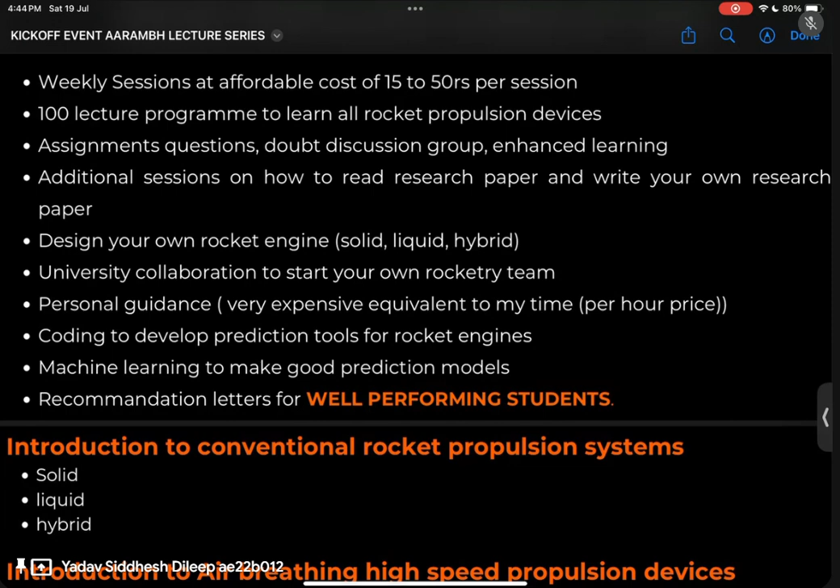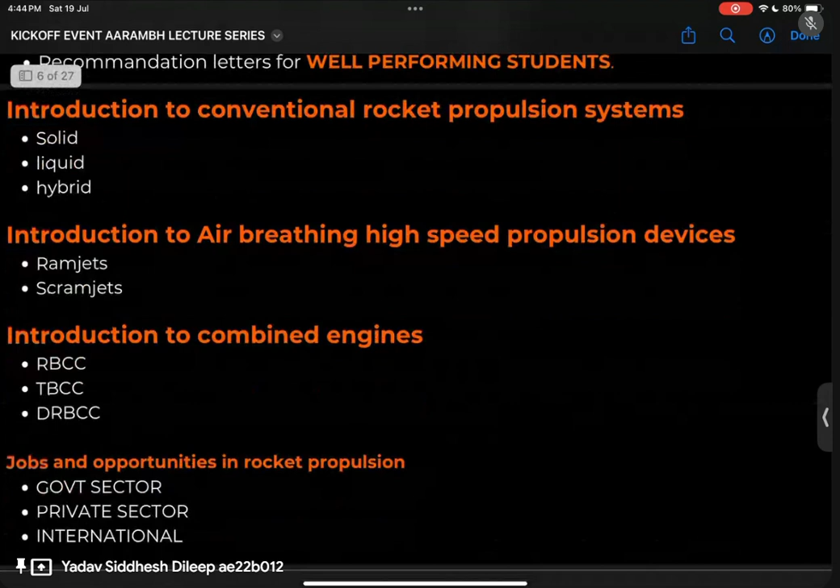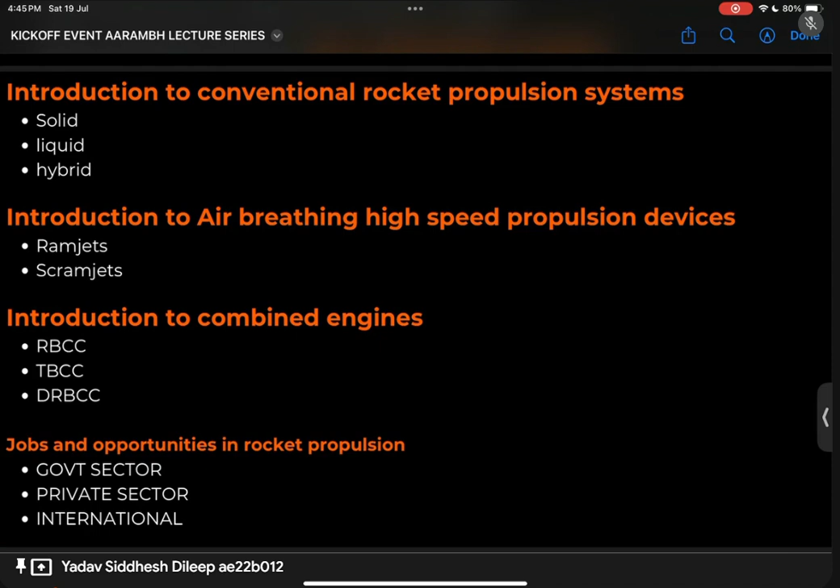Starting today's session, I will talk about four topics. First, introduction to conventional rocket propulsion system. Second, introduction to air breathing high speed propulsion devices, that is ramjets and scramjets. Third is a very complicated topic that very few people in the world work on, and this is the domain I want to pursue my career in, combined cycle engines, also called RBCC, DRBCC, TBCC, TRRE, etc. These are rocket based combined cycle engines, dual rocket based combined cycle engines, turbojet based combined cycle engines. Then we'll talk a little about the opportunities available.

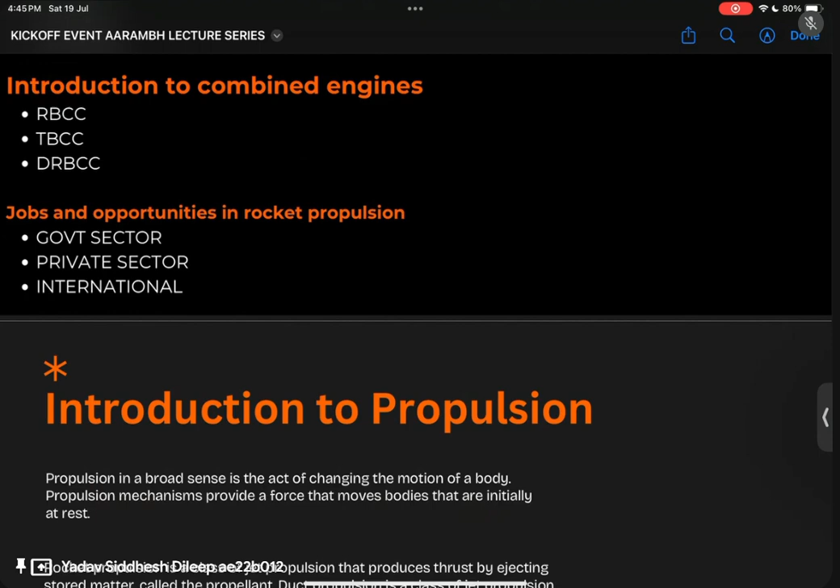Starting with the classification of rocket propulsion system, it's divided into two parts: thermal and non-thermal. Thermal is related to heat, meaning you release heat energy, you burn something or have some form of energy released as heat, and that thermal energy is converted into kinetic energy with the help of a nozzle, giving high thrust. Non-thermal is everything except thermal energy, that is solar, cold gas thrusters, electrical beam thrusters, nuclear ion based, etc. That's the basic difference between thermal and non-thermal.

We will be looking at thermal propulsion systems, specifically chemical propulsion systems in this course, and later we can see other systems. Within thermal, there's chemical and non-chemical, these are the ways to produce thermal energy. Chemical means using chemical energy to make a reaction, converting it into thermal energy, basically exothermic reactions. In chemical, you have monopropellant and bipropellant.

Now I'll give a small example. Take a candle burning. You have a candle burning and you put a glass on it, and what happens is the candle stops burning. This is a very important example, because what's happening here is you're stopping the oxygen flow by putting the glass on the candle, since no more oxygen reaches it and it stops burning.

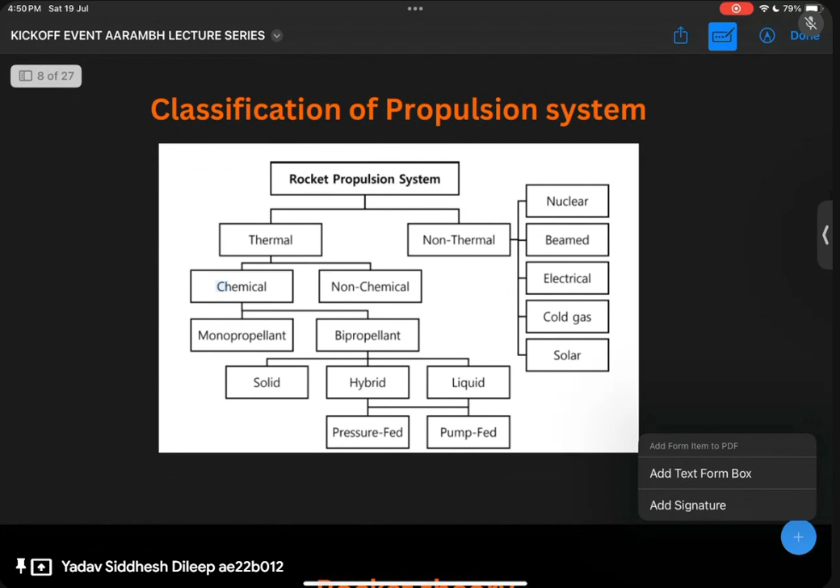We will be looking at solid, liquid, hybrid, and two other stuffs in the upcoming slides. I will explain the next two, that is the pressure fed system and the pump fed system.

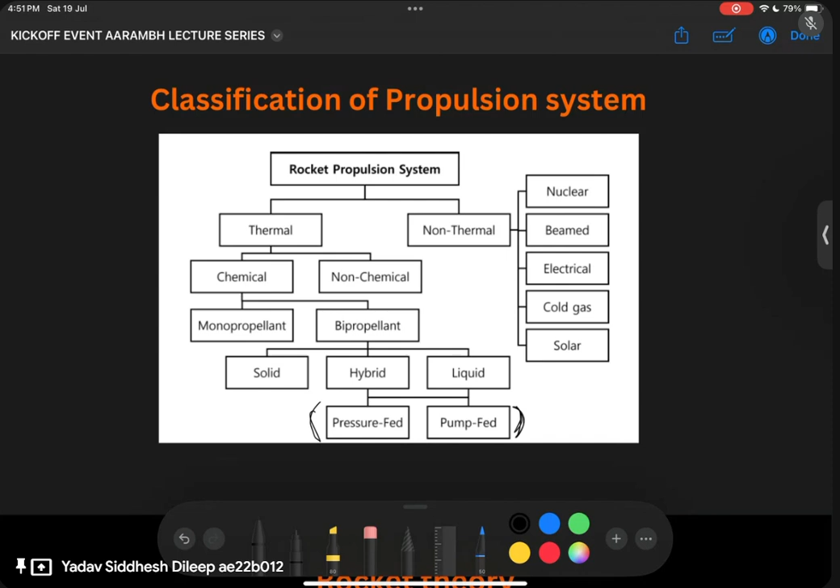Pressure fed system is basically when you have a pressurized gas running your oxidizer. In order to have combustion in the combustion chamber, you should have oxidizer and fuel coming inside, and gases or liquids move because of pressure difference. So if your pressure difference is created with the help of high pressure gas, it is called a pressure fed system.

If your pressure difference is created with the help of a pump, like we do in rural villages where you have a pump which extracts water, that is called a pump fed system. Simple as that. Okay, just a minute.

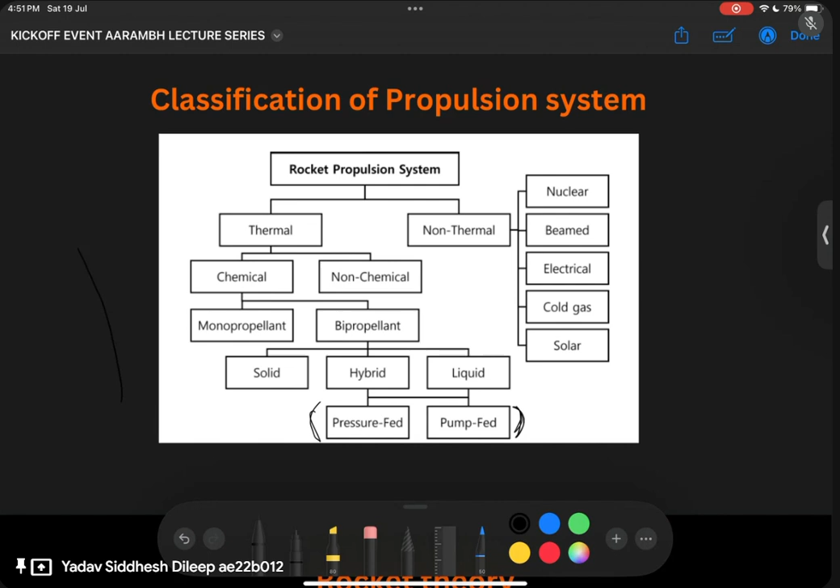So this is about the pressure fed and pump fed systems. Coming to rocket theory, a rocket operates based on Newton's third law of motion. That is, one thing goes out, the hot gases, and it pushes the combustion chamber, which in return pushes the airframe or body of the rocket, which moves the whole rocket.

In the second and third part of the series today, m dot is the mass flow rate of the fuel, measured in kg per second, or the mass going out of the rocket every second. V exit is the exit velocity, meaning the velocity at the exit of the nozzle, wherever the rocket nozzle ends, whatever the gas velocity is there is called the exit velocity.

A is the exit area of the nozzle, that is the exit cross sectional area. PE is the exit pressure, meaning the pressure of the gases at the exit of the nozzle, which is not necessarily equal to the ambient or atmospheric pressure. It can be different, it can be the same.

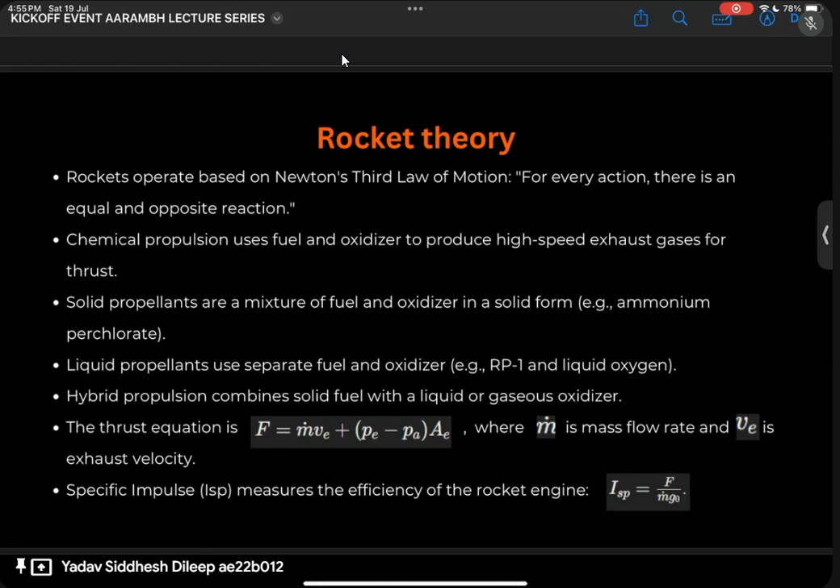Then you have another very important term, the overall exhaust velocity, also called ISP or specific impulse, which measures the overall performance of a rocket engine, not only the propellant but the whole rocket engine. I will explain how you compare two different propellants in the later part of this course.

This slide I don't think is of much use because as I already explained.

Let's come to the solid rocket motor. This is how a solid rocket motor looks like. I think most amateur rocketry teams or clubs in India are working on solids, because India has a very strong foundation in solids compared to any other place in the world. So let's see what a solid rocket motor consists of.

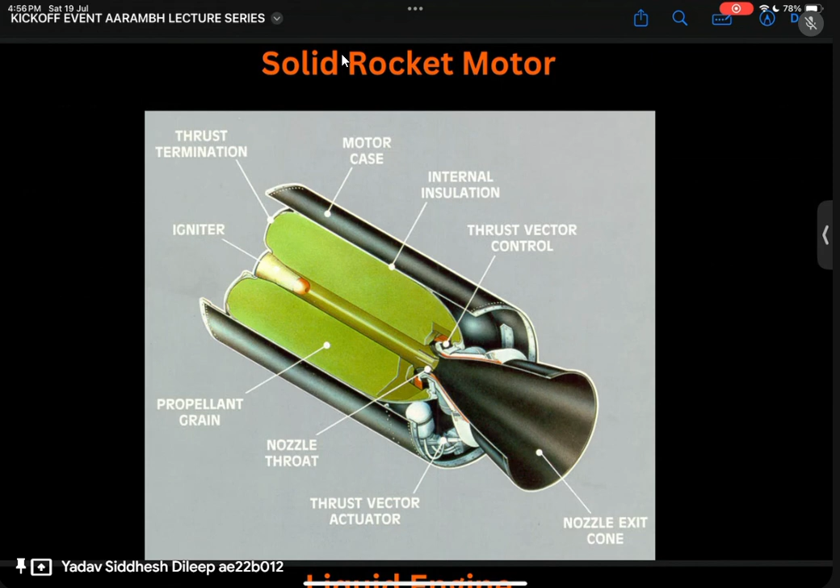First thing you can see here is the igniter. The igniter is basically something which is required to burn the propellant. I will explain how it works. We will be talking first about the propellant grain. As I told you, in solid propellants both oxidizer and fuel are in solid state. This is the propellant - this is how it looks inside the rocket engine or rocket motor.

And why do you have an igniter? I'll give you a very basic example. You have a gas stove in your houses. When you turn on the gas stove, at least in India, it does not catch fire on its own. What you have to do is give a spark with the help of a lighter or an ignition system - that lighter you can call an ignition system. Similarly for the solid rocket, it cannot burn on its own. It needs something which can burn and start the combustion. So you can take the analogy of the gas stove in your house, and similarly we want the solid propellant to ignite.

The motor casing is mostly made up of aluminum or steel.

Now I will explain why we have internal insulation here. If you search the melting point of aluminum or steel or even super alloys, it is maximum around 1000 Kelvin - it will melt above that temperature. When combustion is happening inside, meaning when the propellant is burning, the temperature produced inside the combustion chamber is around 3300 Kelvin, and this metal melts at 1000 Kelvin, so it will definitely melt off. So you need something which has lower thermal conductivity, which cannot conduct the heat energy and absorbs most of it. That is called insulation - a thermal insulator.

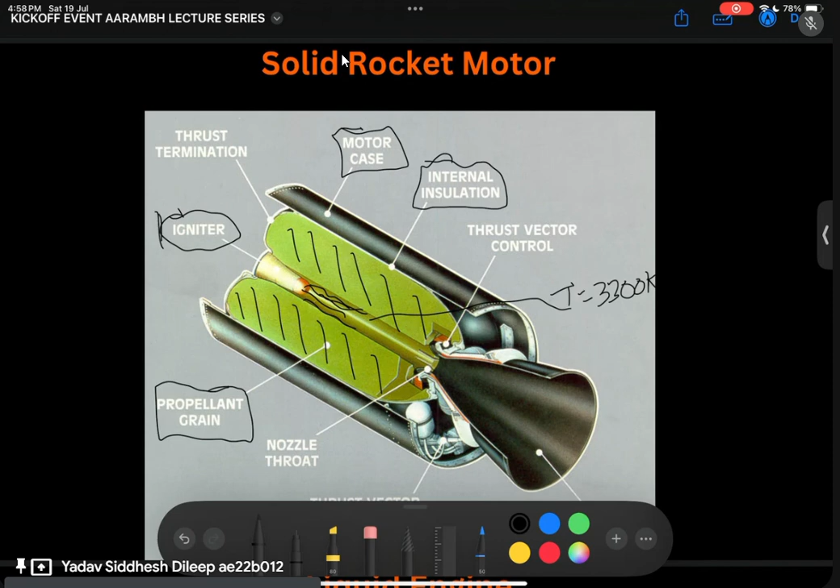Now I will explain about the rocket nozzle. So then we have a rocket nozzle, a converging-diverging nozzle. In today's session, in the later part, we will understand why we have a converging-diverging nozzle and not only a converging one. I'll give you a basic explanation of what this nozzle does.

This nozzle basically converts the energy of the hot gases, that is thermal energy, into kinetic energy - it accelerates the gases. I will give you a basic example to get a physical feel of how a nozzle works. If you open your mouth and try to blow air onto your hand, you will feel less force on your hand. But when you purse your mouth, decreasing the area from which the air comes, and blow air with the same pressure, you will feel more force. This tells you that when you decrease the area, the velocity or speed of the gases increases. That is the simple concept of a rocket nozzle - it does the same thing. It decreases the area so that velocity increases, and then again increases the area to further increase velocity. We'll look at why we increase the area later.

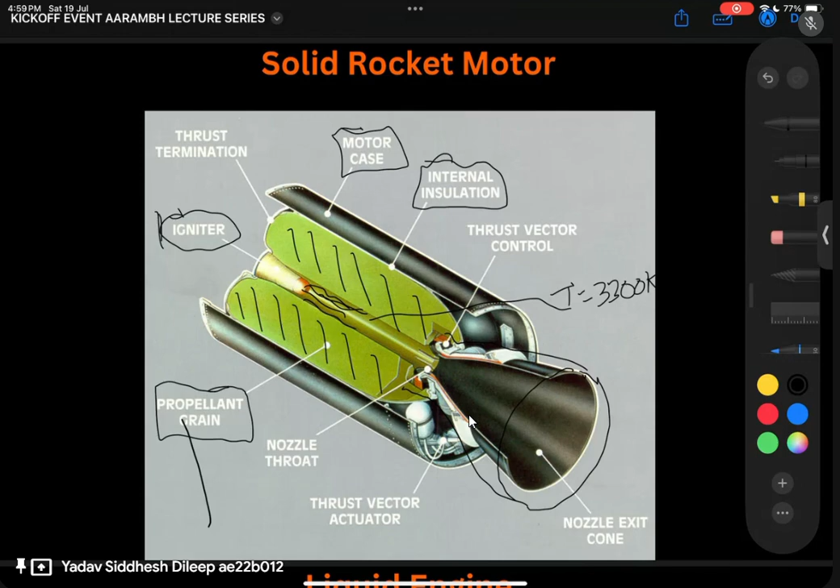Next is the liquid rocket engine. I could have showed you the actual liquid rocket engine, how it looks, but you will be scared looking at the actual liquid rocket engine because it's very complicated. So that's why I put a simplified version of it, that is the schematics of a liquid rocket engine. And this is my work from ISRO, what I did at ISRO, so I can use and explain it in a better way.

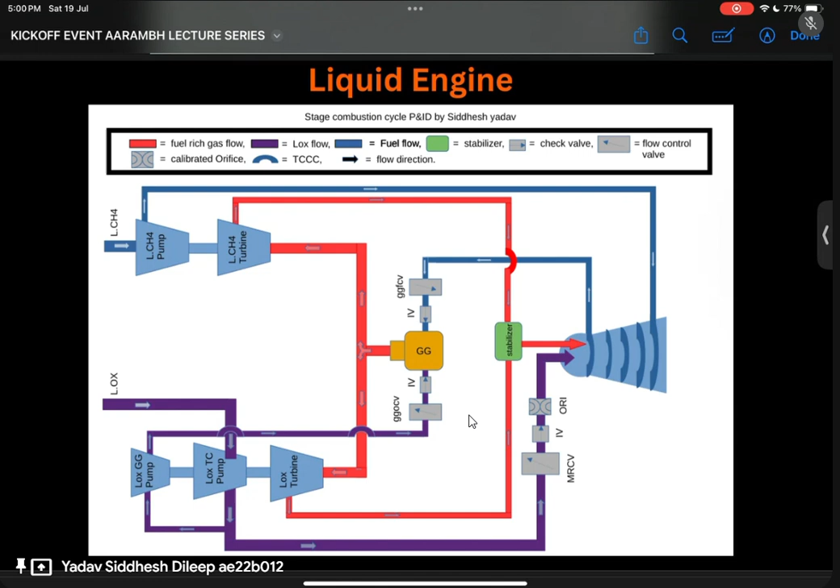This is a staged combustion cycle. I will explain to you what it is in a very simple way. Basically, you have a thrust chamber, that is the main engine. And in liquid, because you have both oxidizer and fuel, you need to store it separately and pump it inside the chamber. So here there are storage tanks. This is for liquid oxygen, this is for liquid methane.

The fuel comes from here, oxidizer comes from here. This is the pump. It means this is a pump fed system. As you know, in the villages, when you want to extract water from the ground, you need to create pressure. That happens with the help of a pump. So the same thing is happening here. There is a pump which is increasing the pressure of the fluid. But to run the pump, you need electricity. But in a rocket, getting electricity is difficult.

So that is why we have a turbine. When a turbine is rotated, it has a shaft connecting to the pump which rotates the pump at the required RPM, or the required angular speed. But how do you run the turbine now? The turbine is run with the help of hot gases generated in the gas generator. Basically, you put a small amount of fuel and oxidizer in the gas generator, burn it, hot gases are produced, which run the turbine. The turbine runs the pump, and the pump starts the flow of the fluid inside the combustion chamber.

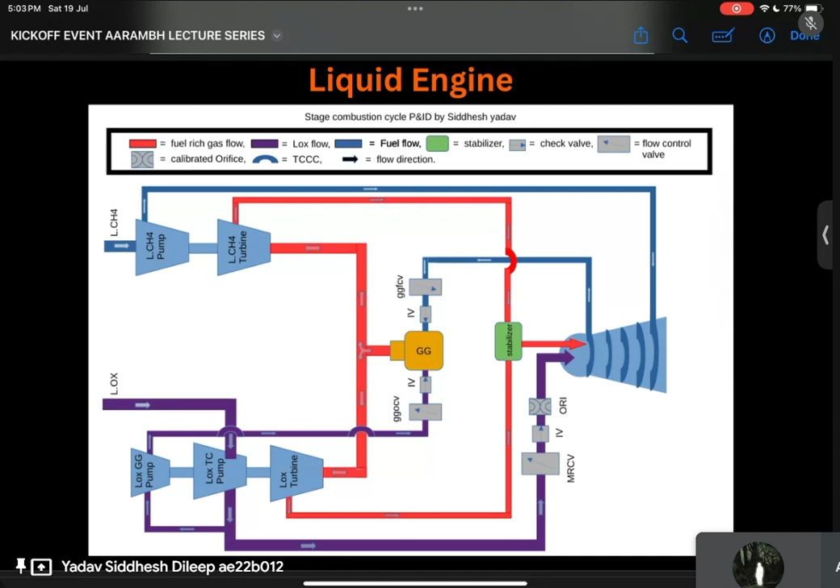Now let's talk about hybrid rocket engines. If you have some doubt, you can note it as of now. Once the first part of the session is over, then we can continue with the doubts. This is the hybrid rocket engine.

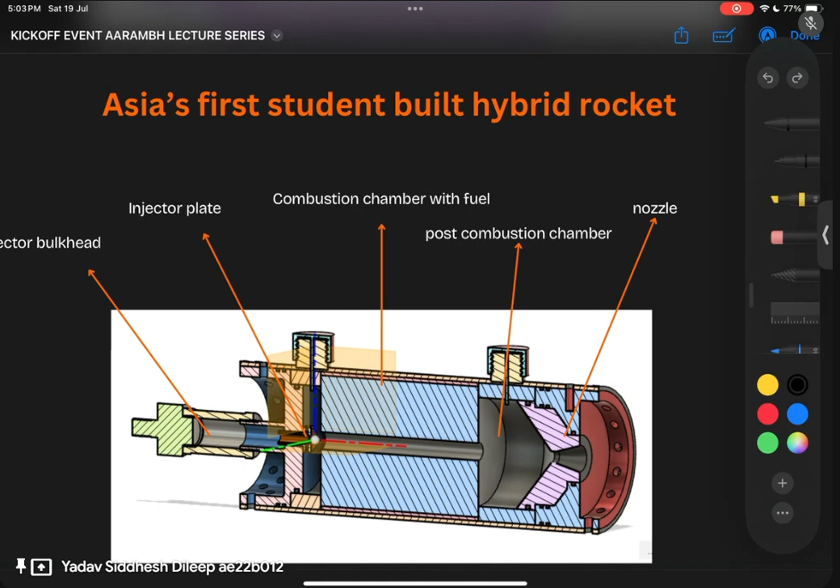This is also Asia's first student-built hybrid rocket engine. This is basically my design, my combustion chamber design of a hybrid rocket engine. You see, there is an injector bulkhead. Okay, change the color. There is an injector bulkhead over here. So I will tell you what happens in a hybrid.

In solid, fuel and oxidizer were both in solid state. In liquid, both were in liquid state. Now, there has to be something in between. So we have hybrids. This is the solid fuel. All this can be made up of candle wax also. So candle burning is basically a hybrid rocket burning, for your reference. This is the fuel, and because the fuel is in solid state, you can keep it in the chamber. But the oxidizer is not in solid state. The oxidizer is in liquid state, so you have to inject it from here.

That is why you have the pumping, plumbing system, everything behind it, and you have an injector to atomize the liquid, or just straight flow injectors for gaseous flow where you don't need atomization. This is the combustion chamber with the fuel. See, this also consists of the insulation like solid does. It has qualities of both solid and liquid. So in case you want to work on something in future which is a solid liquid hybrid or a combination, then hybrid is the best thing for you to learn solid and liquid both at the same time.

Now we have a pre-combustion chamber and a post-combustion chamber. These are basically void spaces. I will tell you why a pre-combustion chamber is there. Because when you inject the fluid, it is getting atomized, and in the pre-combustion chamber the fluid circulates or recirculates.

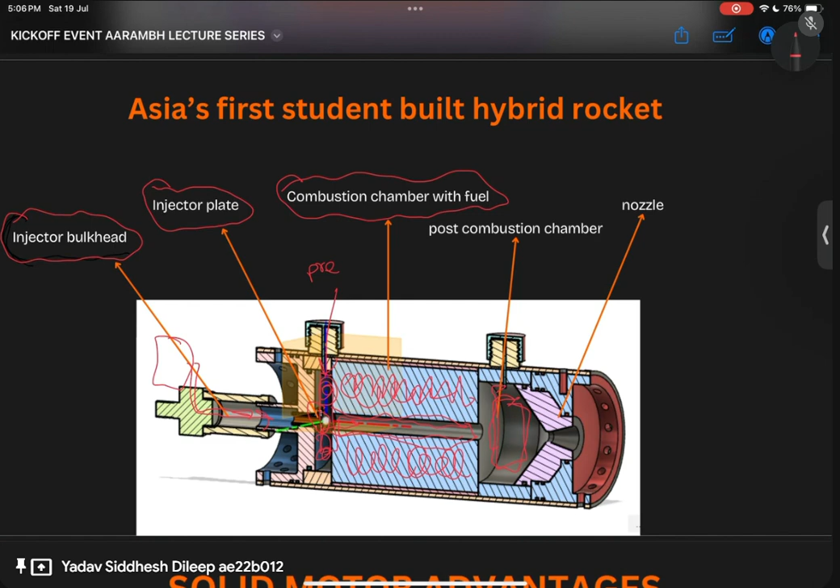This area is very less. There is a boundary layer formation, viscosity, everything is there. Your combustion cannot be completed in a very small region. For combustion to complete, for the oxidizer and fuel to mix properly, burn and release high temperature gases, you need more volume. That is why we have a post-combustion chamber. That is a void space in which your oxidizer and fuel have plenty of time, that is a residence time, to mix with each other and produce high temperature gases.

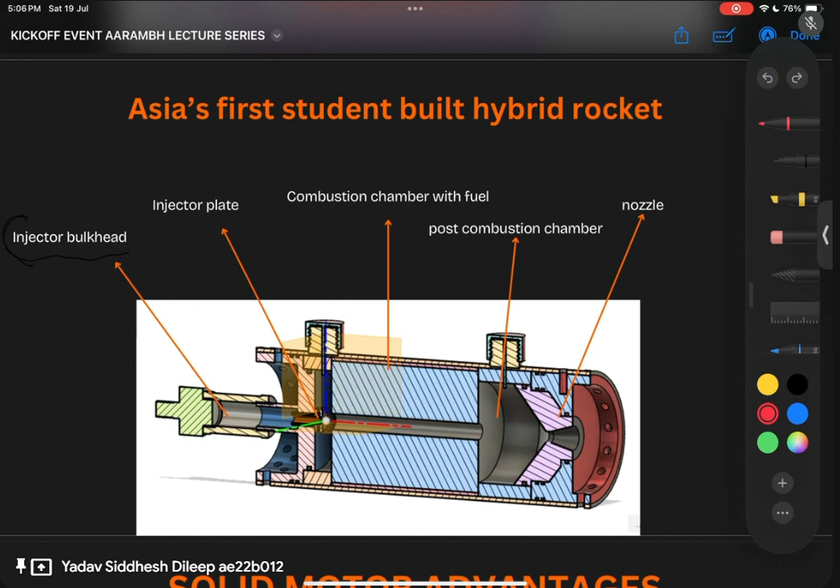Then we have a rocket nozzle, same as a liquid or solid. This concludes our discussion on hybrid. I will just remove all the markings that I have done. Cool. This completes our discussion on solid, liquid, hybrid, the basic initial introduction.

Now let's come on to the advantages of solid rocket motor. It has a very simple design, very easy to operate. Just put an e-match and basically Diwali rocket. I forgot to give you the example. Diwali rocket is a solid rocket, and you know how easy it is to operate a Diwali rocket. The same difficulty level is for operating an actual solid rocket also. If you don't have any avionics or anything, just want to fly it, just burning the solid rocket motor has the same difficulty as a Diwali rocket, nothing more.

It is ready to operate quickly. That is why it is used in most of the missile applications or military applications. There will be no leakage, no slosh, and it decreases the weight because both oxidizer and fuel are in solid state. There is no plumbing required. Just put them in a container and boom, fire. And a very important part of solid rocket motor, why it is used in military application, is the shelf life. You can store a solid rocket propellant for over 5 to 25 years.

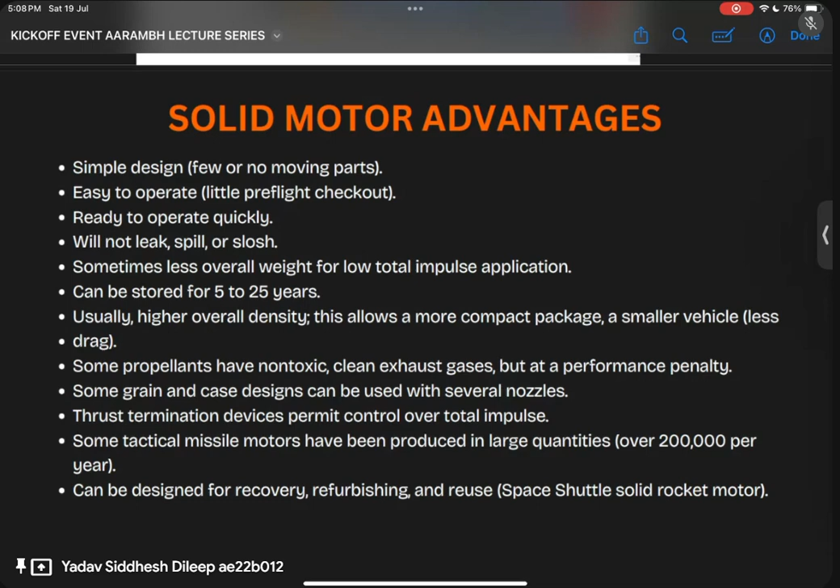Because in a combat situation, if the enemy is attacking your place, you don't have time, you can't load a rocket, you can't fill the rocket engine with oxidizer. What you have to do is basically just load the propellant in the rocket fast and fire. So that is why solids are mostly used in missile applications, military applications.

Some of the propellants are non-toxic, clean exhaust. Okay, there is nothing called sustainable clean propulsion. Everything has exhaust which is toxic. Even water and carbon dioxide as exhausts are increasing global warming. So there is nothing called non-toxic stuff. It only depends on where you are firing it.

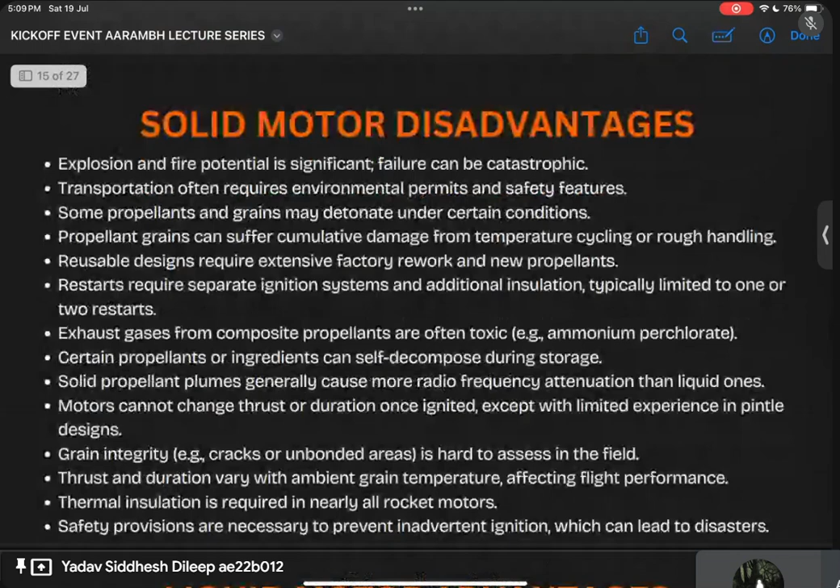For example, if you have fluorine as exhaust gases or chlorofluorocarbons, if you are firing on Earth, it is very dangerous. But if you are firing in space, no worries, because there will be no bad effect of it. So it depends on the location where you are firing it. These were the advantages of solid rocket motor. Now let's talk about the disadvantages of a solid rocket motor.

You know, Tipu Sultan's army, they were firing solid rockets on the enemy. And the story is, most of the soldiers of Tipu Sultan died not because of the enemies' attack, but because of their own solid rockets blasting or exploding on the launch pad. So this proves that solid rocket motor explosions can be catastrophic.

It can catch fire anytime, depending on the energy it is absorbing from the atmosphere. Transportation is very difficult because in solid rocket propellants you cannot have cracks. If you have a crack in solid propellants, then gone.

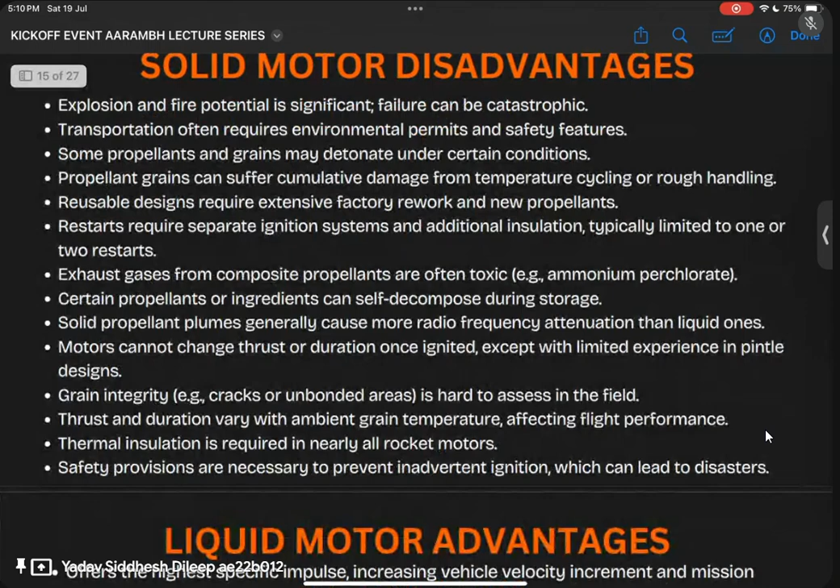You can't, basically; it will blast, or it will not perform in a proper manner. Because the regression rate is pressure dependent, the cracks can increase the burn surface area significantly, and hence it can cause a lot of catastrophic activities. And again, other reasons are the same, like solid rockets you cannot transport easily.

You have to ensure that during transport there are no cracks, and you cannot operate in a variable temperature region. If you design a solid rocket propellant for 30 degrees, you cannot operate it at 40 degrees. There will be variation in performance. If you are designing a solid rocket to work from Ladakh, you cannot fire it in Rajasthan. It can even blast. There can be a lot of performance changes.

Later in the course, maybe in the 20th or 30th lecture, we will look at where these performance variations come from. You can actually derive the numbers. Now coming on to the advantages of liquid rocket engines. Because in solids your oxidizer and fuel are together, you cannot have a highly energetic oxidizer and fuel stored together, because it can burst or blast anytime.

In liquids, the specialty is that both oxidizer and fuel are stored separately, so you can use any combination you want. That is why the specific impulse, the performance parameter, is higher in liquids, because you have the freedom to choose any oxidizer and fuel. In solids you do not, because even if a fuel-oxidizer combination has high ISP, it may not be compatible. They touch each other and it blasts. You cannot have hypergolic compositions in solids, but you can in liquids. So that is one of the benefits.

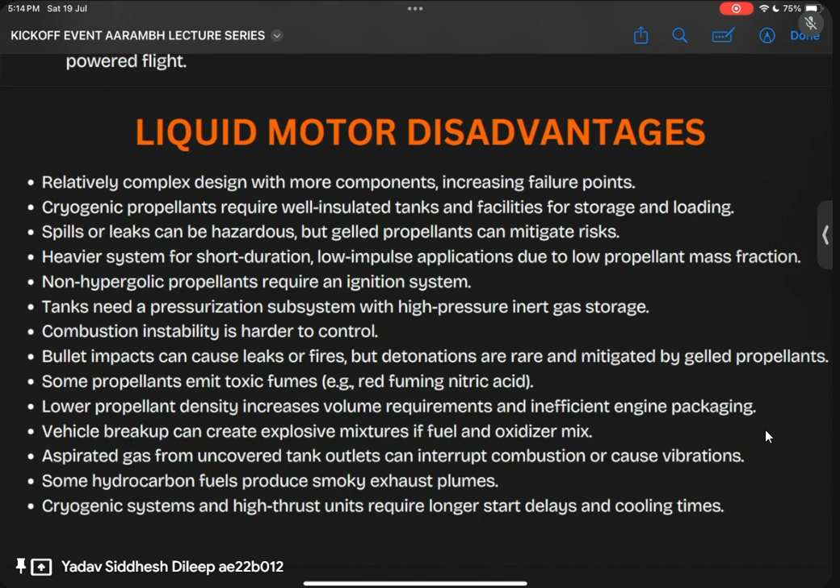You have to create a thermally insulated environment; I am also working on cryogenic propellants, so I know that problem. You have to store it in a temperature controlled environment, and you do not want any thermal leakages, because then the material properties can vary. The storage tanks can even blast because of thermal stresses. When the temperature of cryogenic liquids increases, they convert to the gaseous state. Then there is high pressure and a very real chance that it will blast.

Talking about the hybrid rocket motors' advantages, it is very safe to handle.

That is why I personally chose hybrid to work on in my bachelor life, because it's very simple. You can have cracks. I mean, you should not have leakages, but okay. But it is very simple because oxidizer and fuel are both separate, so no chance of combustion or abrupt combustion. You have the oxidizer in liquid or gaseous state, fuel in solid state. So the complexity is also half of liquid. Modes of failure half than liquids.

Combustion instability is very low. I mean it just depends on the oxidizer mass flux you are operating at, but generally it's very low. You don't generally have instability in hybrid rockets unless you are not a good designer. Scalability, you can scale hybrids. I have scaled my hybrids from 200 newtons to a 5.4 kilonewton scale, and the rest you can just read off. You can transport it, unlike solids, which are difficult to transport.

Disadvantages of hybrids: lower performance. Specific impulse is really low in hybrids, and regression rates, basically the rate at which the fuel burns, are also very low because of the diffusion dominated flame combustion and the flame in the boundary layer. So this is one of the disadvantages which I consider. There is a potential chance of the combustion blowing out when the fuel is about to complete, leaving high sliver losses due to erosive burning also.

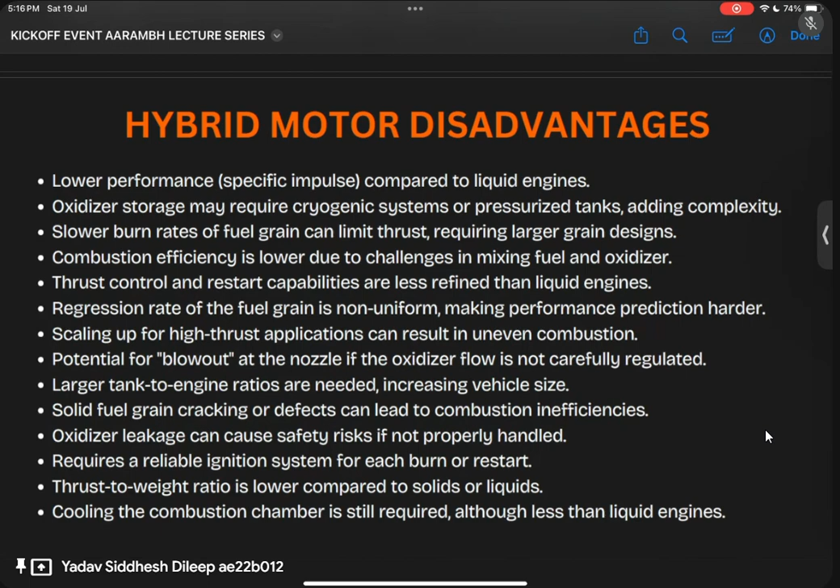So these are some of the problems with hybrids, and again, it requires multiple ignition systems. You can obviously make a hypergolic hybrid system, so that is not an issue.

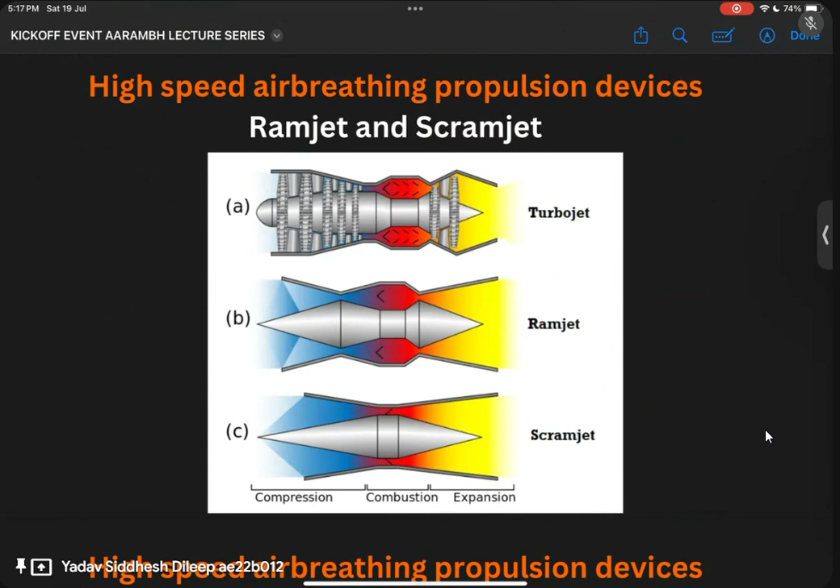So we will be talking now about high speed air breathing propulsion devices, that is ramjet and scramjet. The first image is basically to explain how ramjets and scramjets are built. You have a turbojet, you remove the compressor, remove the turbine, and you have a ramjet. The compression is called the ram effect. That is why it is called a ramjet, because the compression is due to the ram effect.

And what is the difference between a ramjet and a scramjet? Both operate at supersonic slash hypersonic speeds. The only difference between ramjet and scramjet is the combustion velocity, the velocity of gases during the combustion. In a ramjet, when the fuel and oxidizer are burning, the velocity is subsonic. Subsonic means speed is lower than the speed of sound.

In a scramjet, when the combustion is happening, the speed is supersonic. The combustion speed is supersonic, that is, more than the speed of sound. That is why scramjets can go to hypersonic speeds, and ramjets might not go to hypersonic speeds. Yes.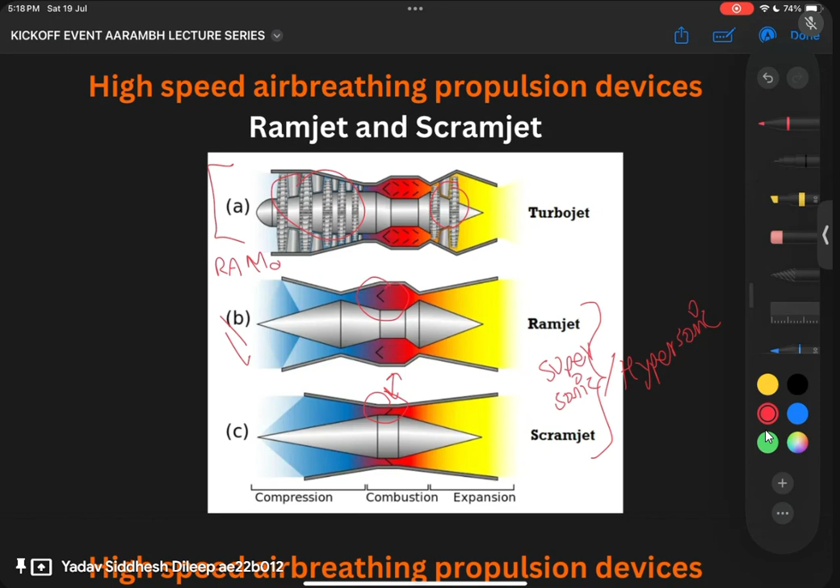This is how a scramjet looks. If you want, you can take a screenshot of this. There is airflow coming, oblique shock generation. There is no normal shock generation in scramjets, but there can be in ramjets, but you want to avoid it.

If the work is going on with oblique shocks, then you have the flame holder over here. There are multiple sockets like this for the flame holder, and then you have the combustor and nozzle. This is the combustor. From here the nozzle starts. Basically you have an increasing area. This is a schematic of a very basic scramjet.

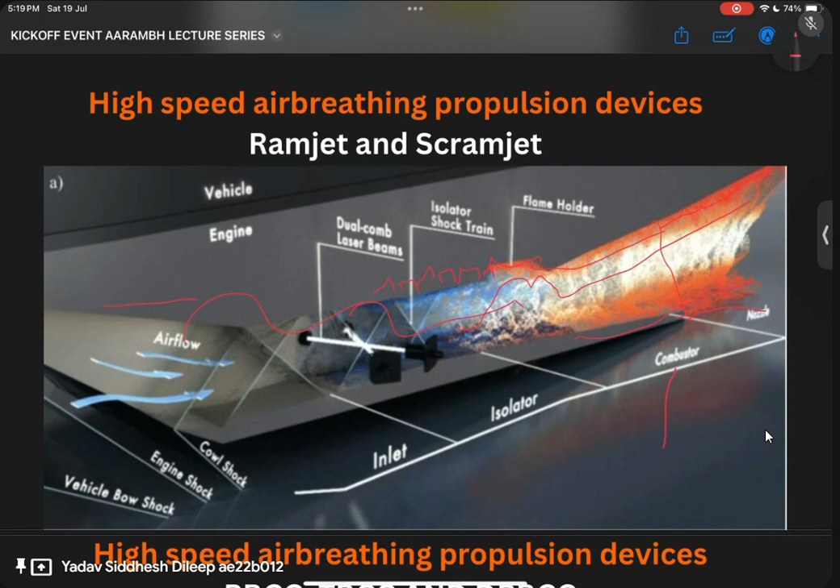Now let's talk 5 minutes on high speed propulsion devices based on combined cycles, that is RBCC, rocket based combined cycle engines. What you have here is an ejector based rocket system, a liquid rocket engine, a ramjet, a scramjet, and a hybrid mode. Everything in a single engine. If these five things are in a single rocket engine, that is called combined cycle based rocket engines, combined cycle based systems, that is RBCC, TBCC, DRBCC.

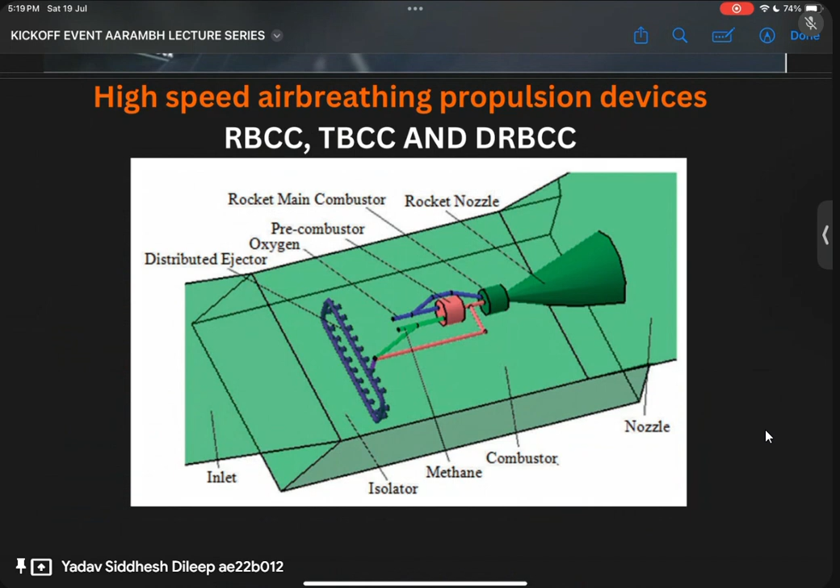This is a good paper on TRRE made by the Chinese, that is turbo assisted rocket augmented ramjet scramjet engine. Not everyone in the world works on this. Very few people in the world work on it, but whoever works on it is valued a lot because this is the most complicated system in the history of propulsion.